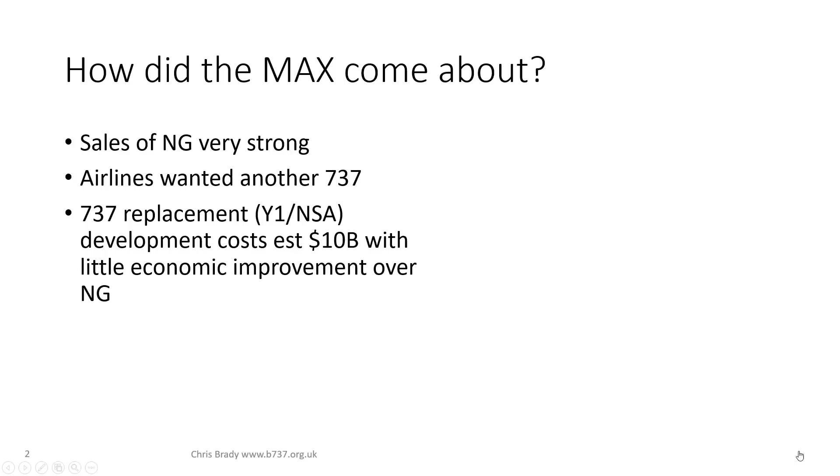So what happened? Why did the MAX come about? Well, the answer actually wasn't from Boeing or from the airlines. It was from CFM. In 2008, they announced the LEAP engine, which was at a stroke going to offer a 20% fuel efficiency improvement over the CFM 56. Now this got everybody interested. The airlines wanted it, and Boeing had to deliver it.

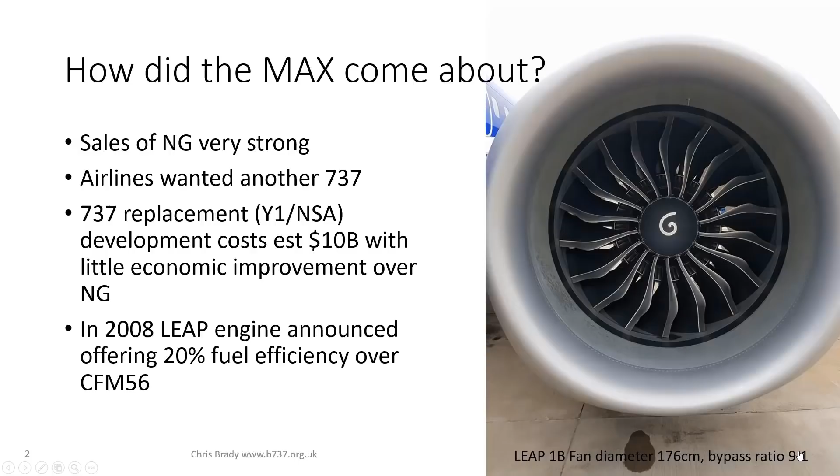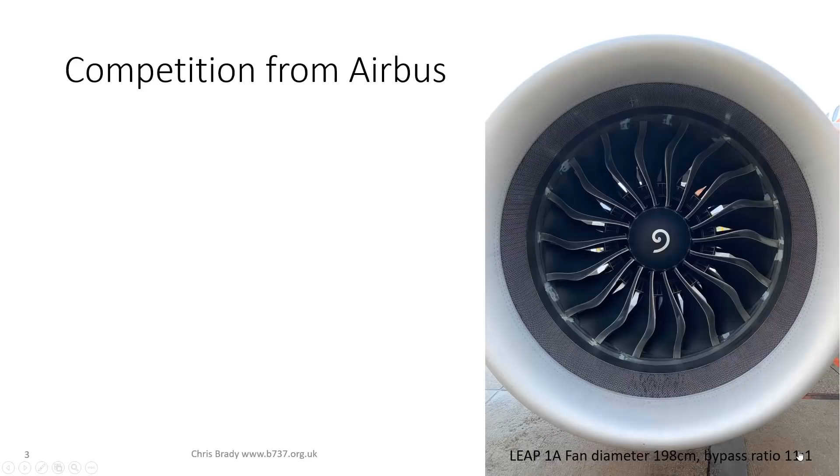However, the A320 family also used the CFM56 and therefore would also use the LEAP engine. Now when I say the A320, I include the 318, 19, 20 and 21. The A320 family is a physically taller, larger aircraft than the 737.

That actually goes back to when the A320 was first designed. It was built with the CFM56 engine, which is a high bypass engine. The original 737 was built with a JT8, which had very little bypass. So the 737 sits lower to the ground than the A320 for historic reasons.

This gave Airbus the advantage. The A320 family could accept the full diameter LEAP engine without any significant redesign. I say full diameter because, as you see in the bottom right, the fan diameter of the LEAP 1A, the Airbus version, is 198 centimeters, giving it a bypass ratio of 11:1.

The largest version that Boeing could accept had a 176 centimeter diameter. That's 22 centimeters less diameter, thereby reducing the bypass ratio on the 737 version to 9:1. So again, there was a loss of economy there.

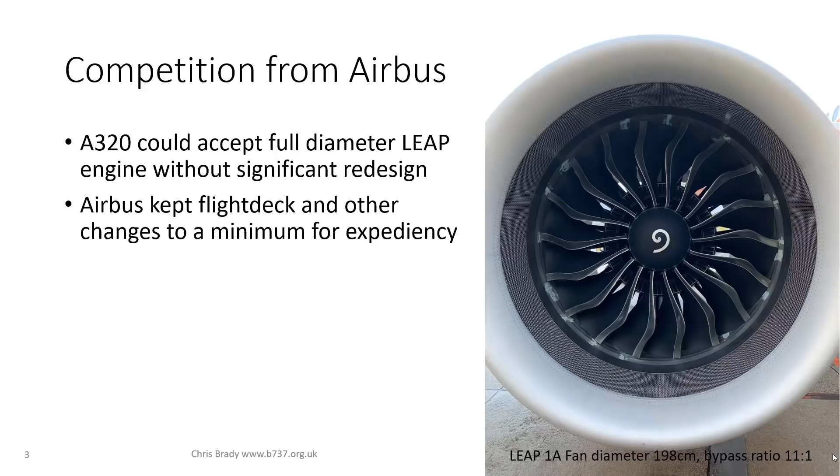Secondly, Airbus kept the flight deck and any other changes to a minimum for expediency. If you look inside the flight deck of the Neo, it is identical to the CEO, the conventional engine option. There were no changes made other than the engine, whereas on the MAX there were many changes. The flight deck is significantly different in the MAX compared to the NG, and there were various other airframe improvements as well, the most obvious being that the tail cone is now conical instead of the old bulbous version, for drag savings.

All of this meant that Airbus were able to launch and take orders 18 months before Boeing. So you see from this that Boeing were immediately on the back foot. This was the first time that the two manufacturers had ever launched a new version of their narrow-body aircraft at the same time. Normally they've been able to take their own sweet time and develop them with the time that they needed.

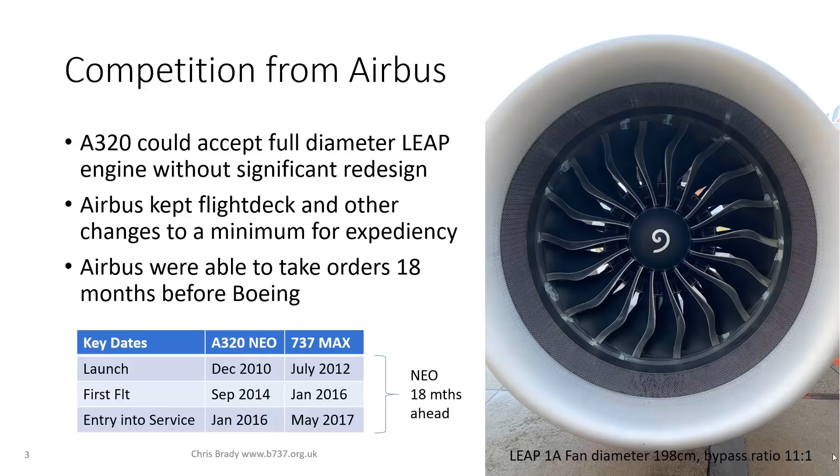But for the MAX, because Boeing was so on the back foot, it was — well, I hesitate to say rushed — but they were always conscious of the competition from the Neo. And all the time that passed meant that the Neo was taking orders that the MAX was not able to take.

So how did MCAS come about? Soon after launch in 2012, wind tunnel data simulating high-speed wind-up turns showed that the aerodynamic interaction between the larger LEAP engine nacelles and the wing created a non-compliant pitch-up. In this case the nacelles were acting as wings in themselves, creating lift. The pitch-up is non-compliant — how do you fix it?

Boeing actually looked at many aerodynamic ways to fix this. They looked at revising the wing vortex generator pattern, at changing or adding a leading edge stall strip, and at revising the leading edge vortilon patterns, but none of these were successful.

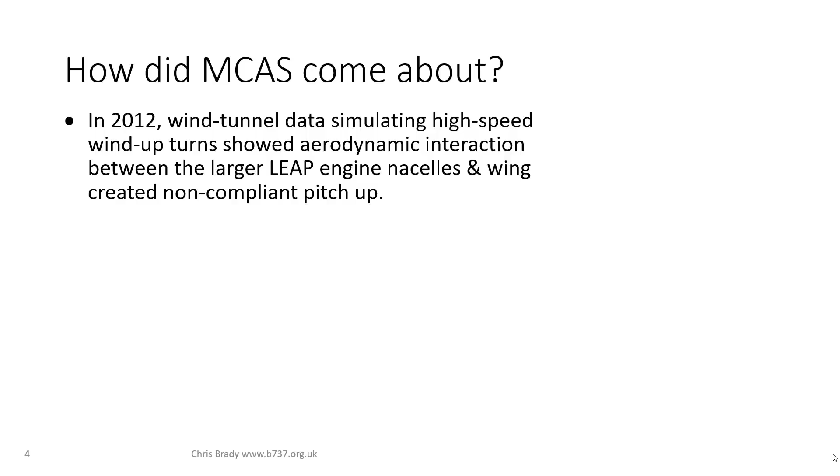So in the end, what they did was borrow a system called MCAS, Maneuvering Characteristics Augmentation System, that they'd fitted to the KC-46A, which you probably better know as the 767 tanker. Now, a couple of things to note about this: it was an absolutely sound, safe design on the 767, and it was only designed to operate, as I quote from the graphic on the right there, at extreme high-speed pitch-up conditions that are outside the normal operating envelope.

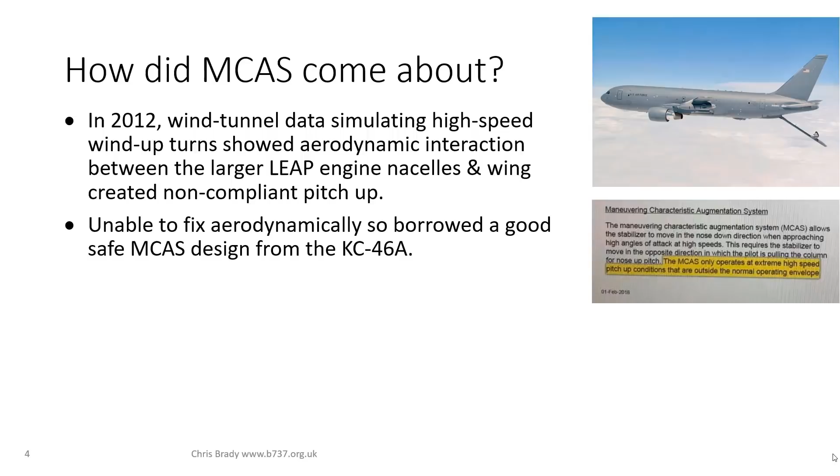So what changed? In March 2016, a couple of months after the first flight of the MAX, flight testing discovered that the low-speed 1G handling was non-compliant against various CFRs, most particularly 25.203, which covers stall characteristics. What they found was that as you approach the stall, the stick force gradient on the control column was actually reversing.

The midsection of the wing was creating lift for longer than expected because of the interaction between the nacelle and the wing. So it was holding on to the lift for longer, and when the stall did break, it fell away quite dramatically.

So the scope of MCAS was extended to low speed, and the logic was changed. Unfortunately, the system safety assessment was not updated, the FAA weren't informed, and MCAS was not documented in the FCOMs or indeed anywhere.

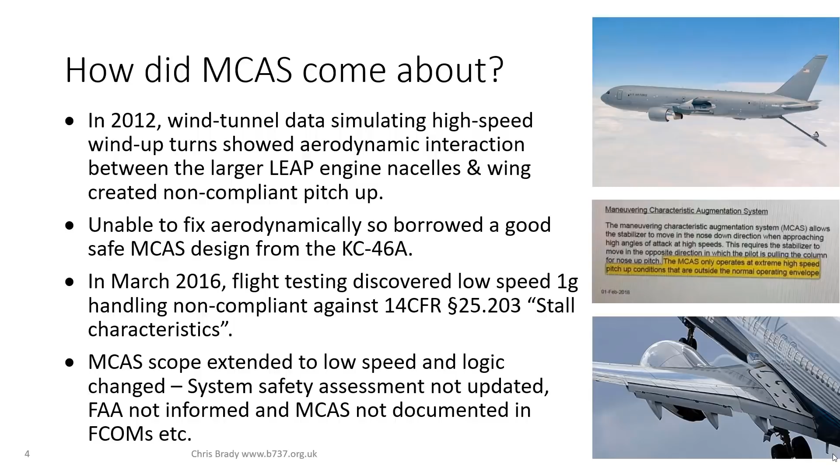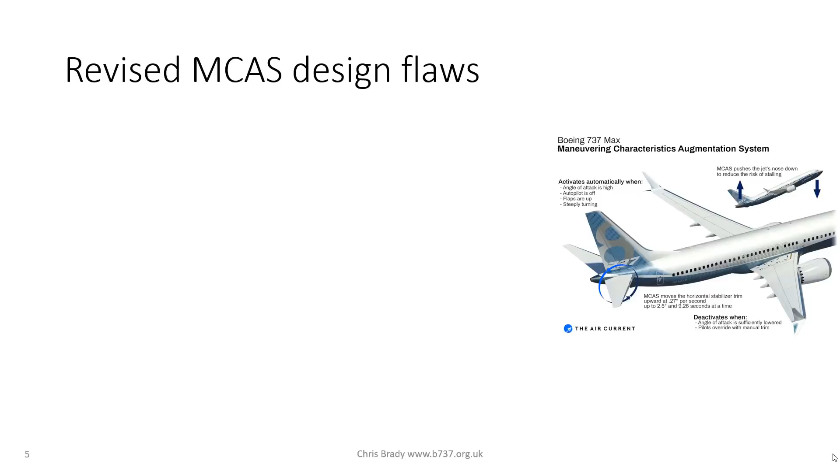So let's take a closer look at these MCAS design flaws. This is the revised version of MCAS. The original version was fine, but the changes they made were the following.

First of all, the activation trigger was from a single angle of attack source. Previously, it had been from an angle of attack source and an accelerometer, because G had been a trigger as well.

Secondly, they changed MCAS on the 737 at the low speed end to continue to cycle—that's 10 seconds on and 5 seconds off—for as long as the condition existed. The 767 version and the original high-speed version was just one cycle.

Thirdly, they had to increase the stabilizer authority of MCAS because they were dealing with a low-speed regime rather than a high-speed regime. And they allowed MCAS to apply more stabilizer than can be counteracted with elevator.

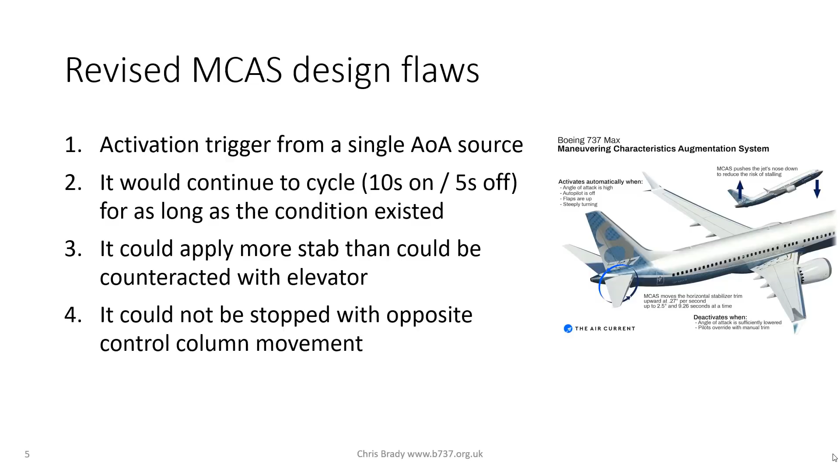Fourthly, the MCAS movement of the stabilizer could not be stopped with opposite control column movement. Now, it could on the 767, could not on the 737.

And finally, there was no dedicated failure warning light or QRH procedure for misbehaving MCAS. Boeing did actually look—it's a matter of public record now—that there was an idea to make an MCAS warning light on the flight controls panel, but for reasons which we'll come to, that idea was rejected.

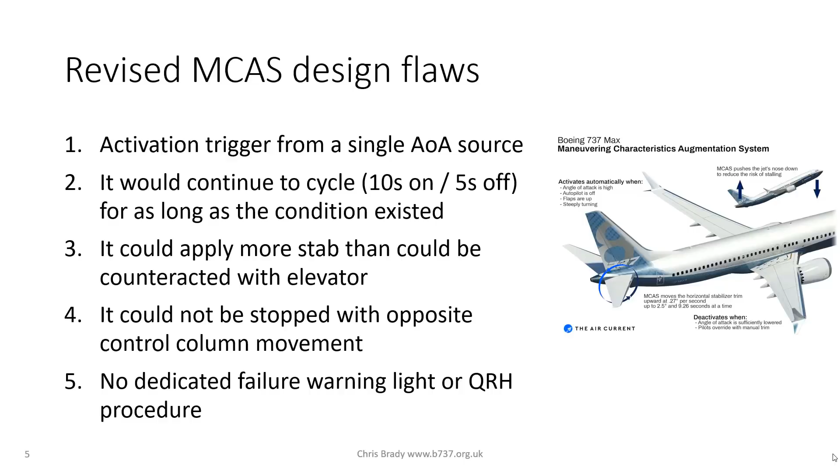Let's take a closer look at that single angle of attack issue. Here's what I was asked about it almost 2 years ago now by BBC Panorama.

If you look in a flight deck, there's actually two of everything, and there's two of everything for a damn good reason—that if one fails, you've got another one. For a system which can have such a dramatic, significant and catastrophic effect on the aircraft, to take its input from one source runs contrary to everything in aircraft design. And I am staggered that Boeing designed it that way. I was also going on to say there was a stagger that Boeing designed it that way and that the FAA certified it that way. Again, we'll come on to those issues.

So let's take a closer look at this angle of attack sensor issue. The 737 has got two angle of attack sensors, one on each side of the nose cone. But MCAS activation was only triggered by a single sensor.

That's because the MCAS is a sub-function of the flight control computer, and only one flight control computer is active on any given flight. The flight control computer in use flip-flops between flights, so on the first flight of the day it'll be FCC1, second flight of the day FCC2. With FCC1, the MCAS feed will come from the captain's angle of attack sensor. When FCC2 is in use, MCAS takes the feed from the first officer's angle of attack sensor.

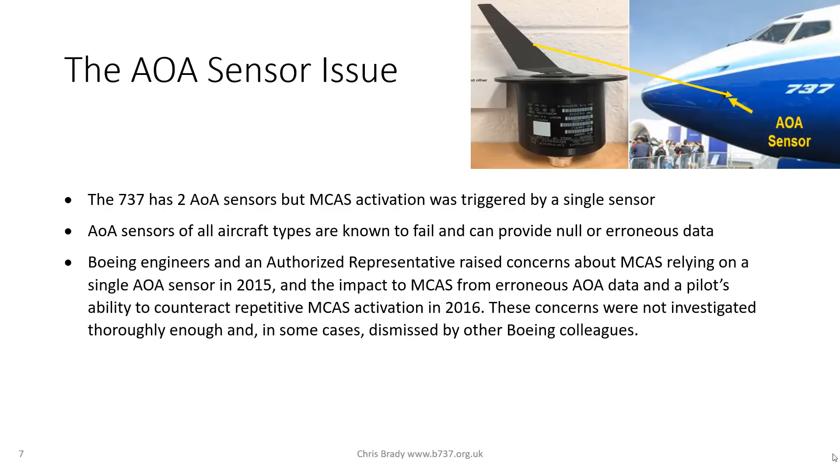Boeing engineers and an authorised representative—now an authorised representative, or AR as they're known, these are Boeing employees that are supposed to report to the FAA and be the FAA's eyes and ears—raised concerns about MCAS relying on a single angle of attack sensor as early as 2015, and the impact to MCAS from erroneous angle of attack data and a pilot's ability to counteract repetitive MCAS activation in 2016. These concerns were not investigated thoroughly enough, and in some cases they were dismissed by other Boeing colleagues.

Next, Boeing discovered in August 2017 that an angle of attack disagree alert was inoperative on 80% of its aircraft. Boeing chose to conceal this fact from the FAA, affected customers and MAX pilots until after the Lion Air crash. Most astoundingly, Boeing continued to manufacture and deliver scores of MAX aircraft with non-functioning angle of attack disagree alerts.

So the angle of attack disagree alert was standard on the NG, and it was supposed to be standard on the MAX, but there was an optional angle of attack indicator display on the PFD, the primary flight display. And due to a programming error, the angle of attack disagree alert was deactivated if customers hadn't paid for the optional angle of attack display.

Now, Boeing discovered this in 2017, a year or so before the first accident, but did not get this fixed. And this could have been critical in the diagnosis of the problem on the accident flights.

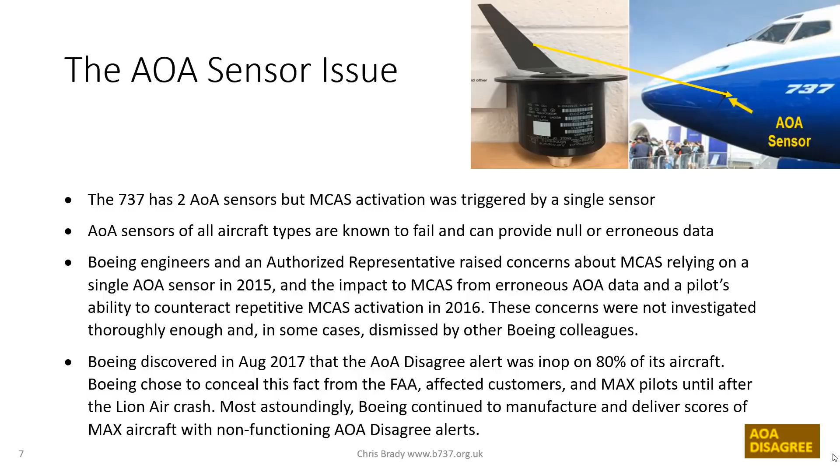So let's look at the accident flights. The first one actually started the day before the accident flight. A refurbished angle of attack probe was miscalibrated 21 degrees too high, and it was installed on the Lion Air MAX.

The aircraft got airborne. The crew got a stick shaker immediately after takeoff. They got indications of an airspeed disagree, and MCAS activated.

Fortunately, there was a pilot on the jump seat. He assisted, and he advised the crew to switch off the stabilizer trim cutout switches, which would deactivate MCAS. Now, none of the pilots knew what MCAS was, but the guy on the jump seat had the capacity to see the stabilizer trim moving uncommandedly, and he directed the crew to switch off the stabilizer trim cutout switches.

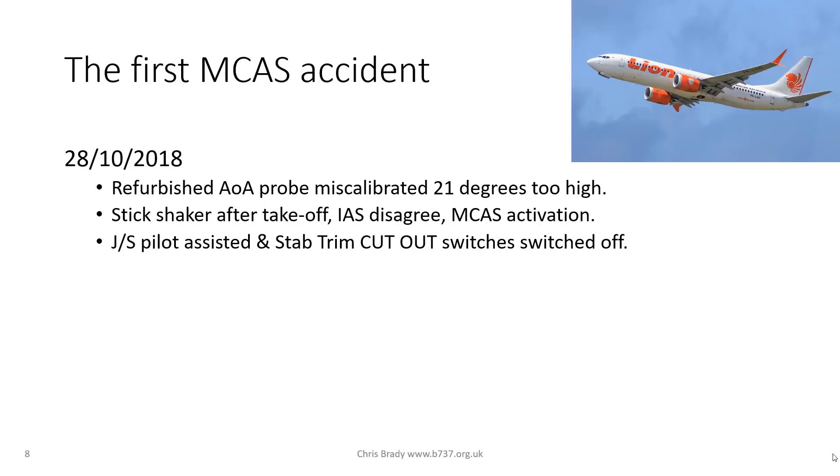That aircraft landed safely. A tech log entry was made as follows, and this is a quote from the report: IAS/ALT disagree shown after takeoff, and feel differential pressure light illuminated. Because that's all the guys knew had happened - they were the indications in the flight deck.

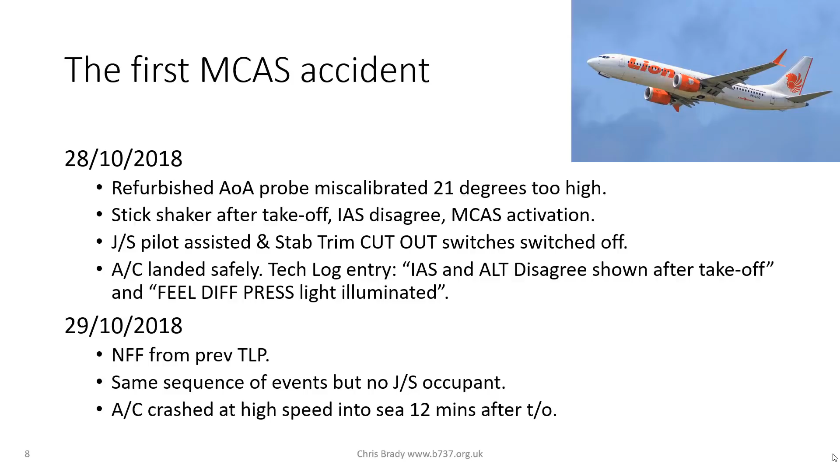Overnight, the engineers worked on that tech log entry, and no faults were found. The aircraft took off again with a new crew. The same sequence of events happened, but there was no jump seat occupant. That aircraft crashed into the sea at high speed 12 minutes after takeoff.

Let's look at Boeing's response to this accident. Boeing issued an FCOM bulletin to emphasize the procedures provided in the runaway stabilizer non-normal checklist. The condition for the runaway stabilizer is given as uncommanded stabilizer trim movement occurs continuously.

Now, I would suggest to you that what the guys got was not a continuous movement of uncommanded stabilizer trim. What they got was up to 10 seconds of stabilizer trim movement followed by 5 seconds off, because that's the programmed logic of MCAS at the time. It was 10 seconds on, 5 seconds off. Furthermore, if you interrupted the 10 seconds on with electric pitch trim, it would stop.

So you would think that you had solved the problem by applying electric pitch trim in the opposite direction. What would happen is, once you'd applied the electric pitch trim, behind the scenes MCAS would count to 5 and then start again.

So the notion that this is a continuous uncommanded stabilizer trim movement is false. And why is that important? Because if you look at the very title of the procedure, runaway stabilizer, if you ask any pilot to describe a runaway condition of the stabilizer or anything, it will be a continuous uncommanded movement towards the full limit, not this sporadic, intermittent application of stabilizer, which is what the crew's got.

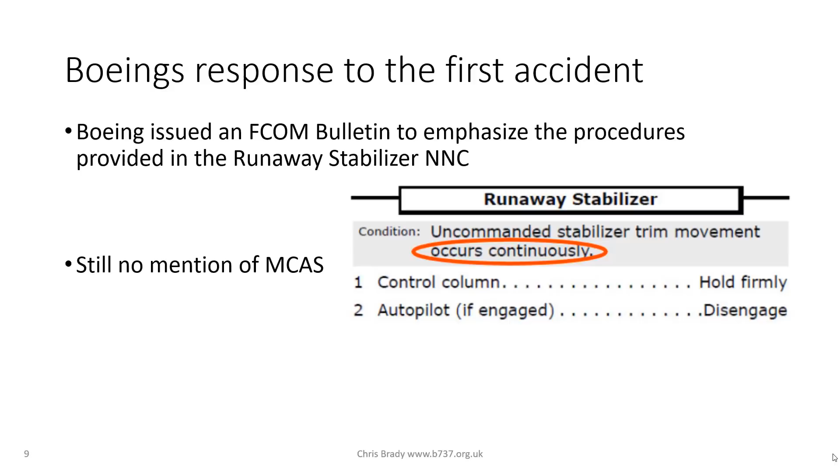Boeing still did not mention MCAS anywhere in that bulletin or anywhere at all. The House Transport Committee's final report on the MAX accidents, which I will quote several times in this presentation, states that the collective responses of the FAA and Boeing in this critical time period between crashes were woefully inadequate and appeared predisposed to blame the pilots.

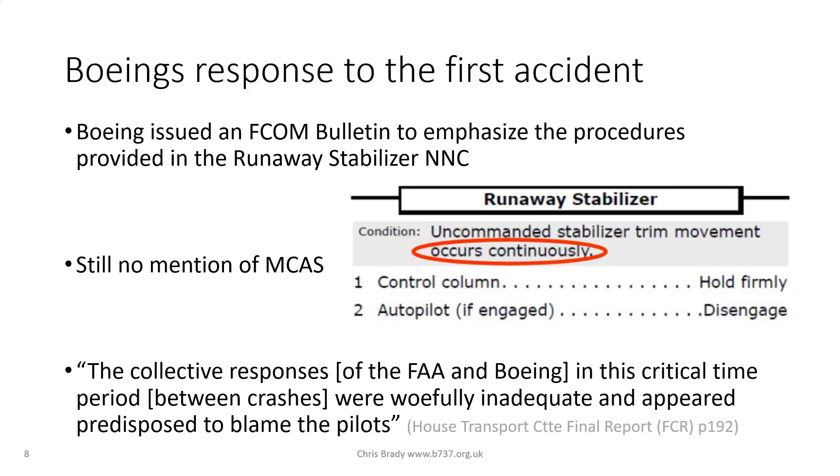I was asked, as have many people been asked, about the actions of the flight crew. Were they good enough? And here's my response. Boeing have suggested that they didn't follow the right procedure. Is that fair? It is unfair.

It's absolutely unfair. If you're going to design and certify an airliner with such a complicated, obscure failure mode as happened to that crew, it's no wonder that your average crew aren't able to deal with it. So let's look more closely at this issue of should the crew have done better.

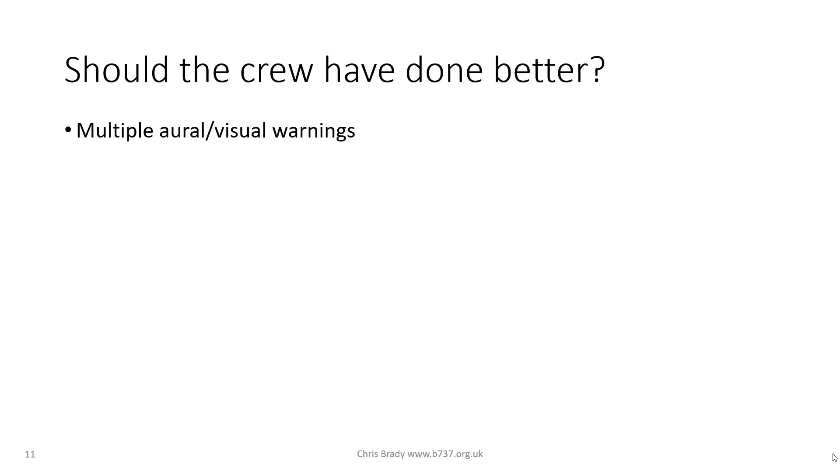Let's have a look at what they got in the flight deck. Multiple aural and visual warnings. The stick shaker sounded the instant there was weight off wheels. So as soon as the aircraft got airborne, the stick shaker started, and it continued all the way until impact. The stick shaker is noisy. The stick shaker vibrates the control column. It is a hell of a distraction.

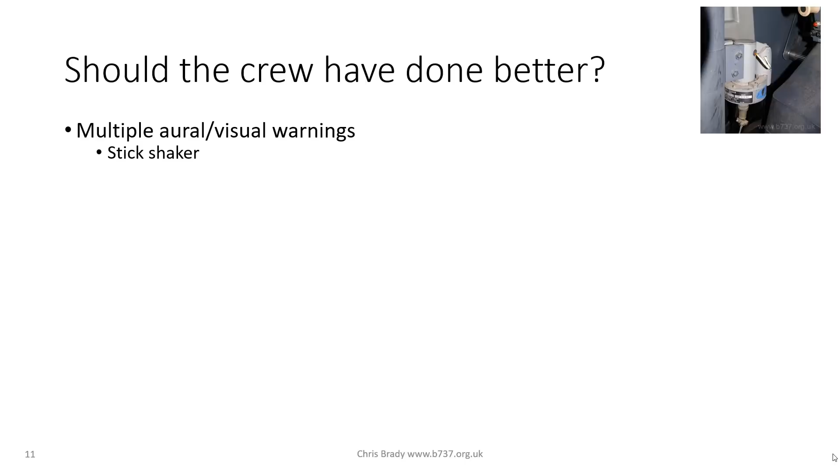There was a difference between the left and right hand flight director pitch bars. Those on the left were saying pitch down because the left alpha vane thought the angle of attack was too high. And the PLIs, the pitch limit indicators, were also pitching down.

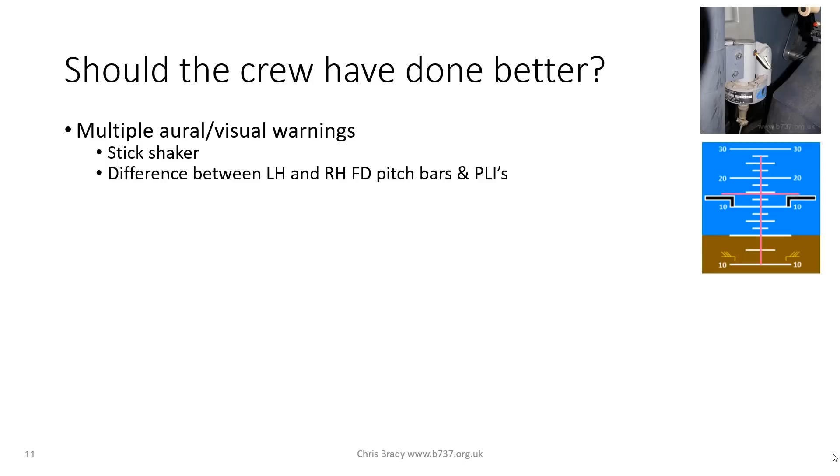The crew got IAS disagree, ALT disagree alerts, and also feel differential pressure caution. This is because the angle of attack feeds into the air data computer, which generates the speed and altitude you see on the PFD.

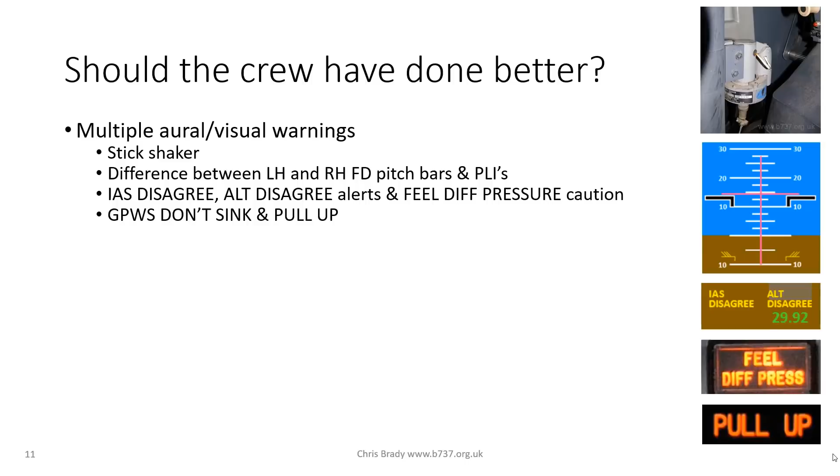GPWS don't sink and pull up. MCAS comes alive after flap retraction, which is commenced at 1,000 feet above ground level typically. Once the flaps were retracted, which would have been say 1,500 feet, the MCAS will have pitched the aircraft down, and that will have given both don't sink and pull up warnings. They are attention getters.

As the flight progressed, the airspeed increased and increased because they were at takeoff power, or actually back at climb power, and the aircraft had been pitching down on numerous occasions, and that combination obviously would give you a very high airspeed, and the overspeed clacker would be sounding.

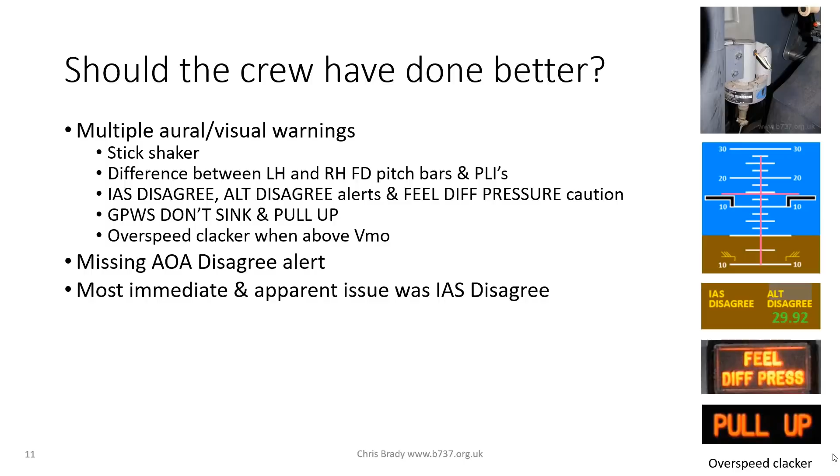So after flap retraction, you get the nose down stabilizer trim for 10 seconds on, 5 seconds off, paused with 5 seconds with the use of electric pitch trim. And that happened on multiple occasions before impact on both flights. I think it was 12 on one flight and 20 on the other. Multiple occasions.

There was no QRH procedure for this scenario. Boeing did not publish one. There's no EICAS on the 737, or ECAM if you're an Airbus pilot.

So the 737 will show warnings like the feel differential pressure one on the right hand side of the screen there, and it will bring up a master caution system, and from there you then look in the QRH for the appropriate caution and action that procedure.

There's been a lot made since these accidents that EICAS would have detected, for instance, the angle of attack disagree, and would have got down to the root cause of the problem. How true that is or not, we can only hypothesize. But certainly there were, without doubt, multiple warnings going on, and EICAS could have prioritised those.

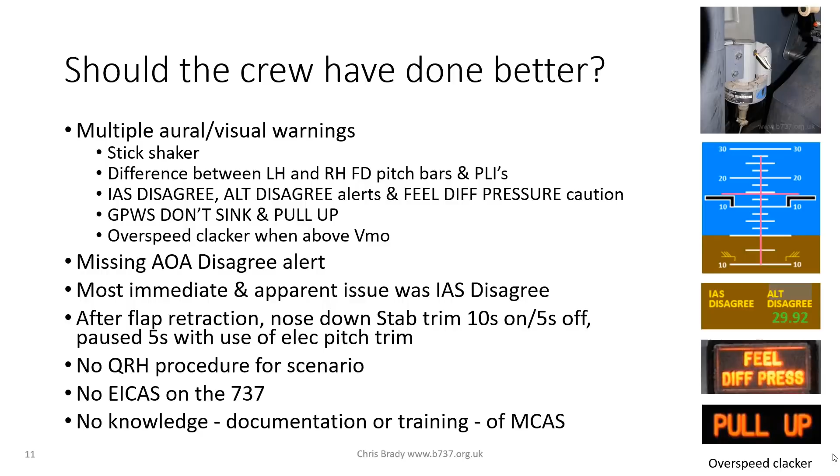Let's look at the second accident. Ethiopia, 10th of March 2019. The angle of attack sensor failed on takeoff at a little over 74 degrees. Again, the crew got the stick shaker, airspeed disagree, MCAS activation, etc.

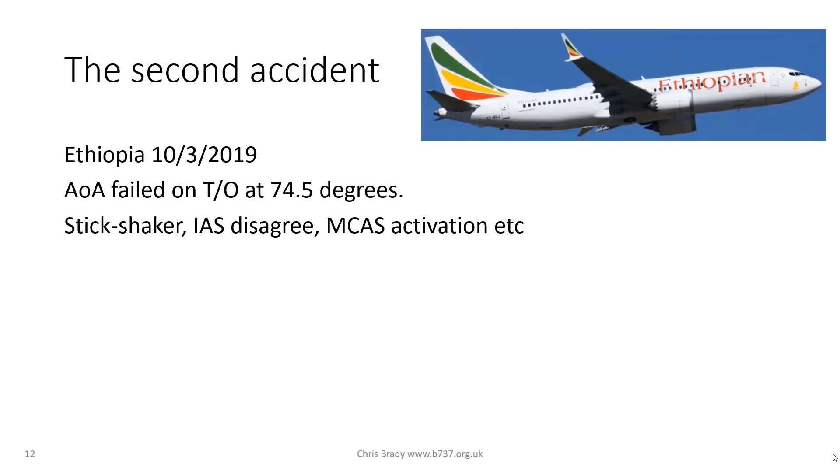In this case, the crew, after 5 minutes, perhaps with the benefit of the knowledge in the bulletin, elected to switch off the stabilizer trim cutout switches. But unfortunately, having done so, they were then unable to move the manual trim wheel because of the high aerodynamic loads.

The CVR heard the FO say he was unable to move the trim wheel. Now, at this time, the aircraft was well over VMO, so the aerodynamic loads were very high. But the control column forces were also very high.

All 346 people on the 2 accident flights perished.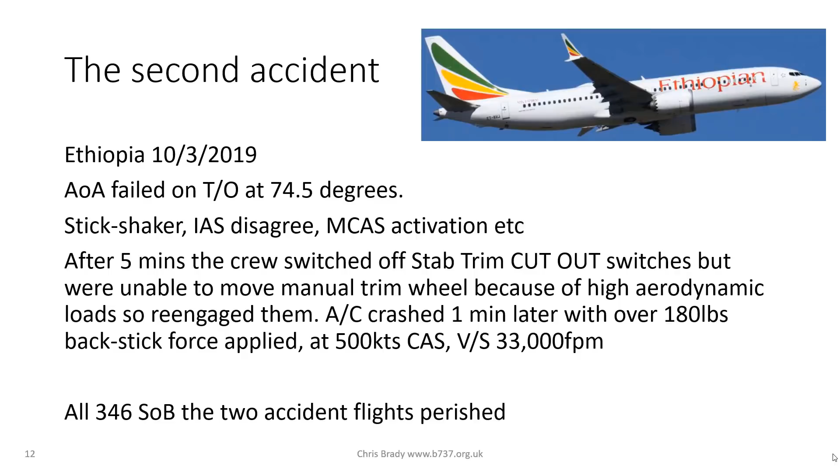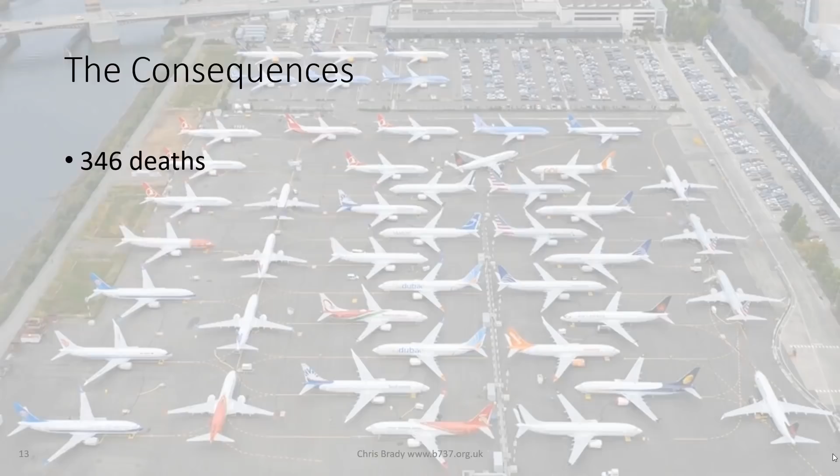So, the consequences. 346 deaths. The MAX was grounded for between 20 and 22 months. It was 20 months for the FAA, 21 for Transport Canada, and 22 for EASA, from the 13th of March 2019, during which time more issues were discovered.

These were things like the capability of the flight control computers, wiring runs down to the stabilizer, debris found in the fuel tanks from production, various things.

The whole episode is believed to have cost Boeing over $23 billion in direct costs alone, plus around 1,200 cancelled orders. Now the list price for each aircraft is, assuming about $100 to $120 million depending on the type, that gives you the 144. If Boeing's profit was, I don't know, 10% of that, there's another $14 billion. So this is already 2 to 3 times more expensive than having designed a whole new aircraft.

Finally, there was worldwide loss of confidence in the MAX brand, Boeing, the FAA, and the regulatory system. I mean, these events did untold damage. However, this is in the process of being fixed and changed.

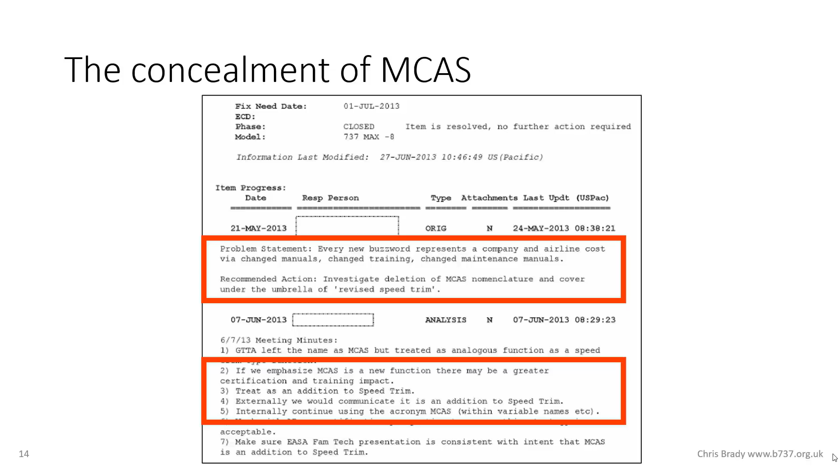The extent of this concealment was actually fairly wide-ranging. Boeing concealed internal test data from 2012, back in the ECAB simulator, that revealed it took a Boeing test pilot more than 10 seconds to diagnose and respond to an uncommanded MCAS activation, a condition which the pilot found to be catastrophic. Federal guidelines assume pilots will respond to this condition within 4 seconds.

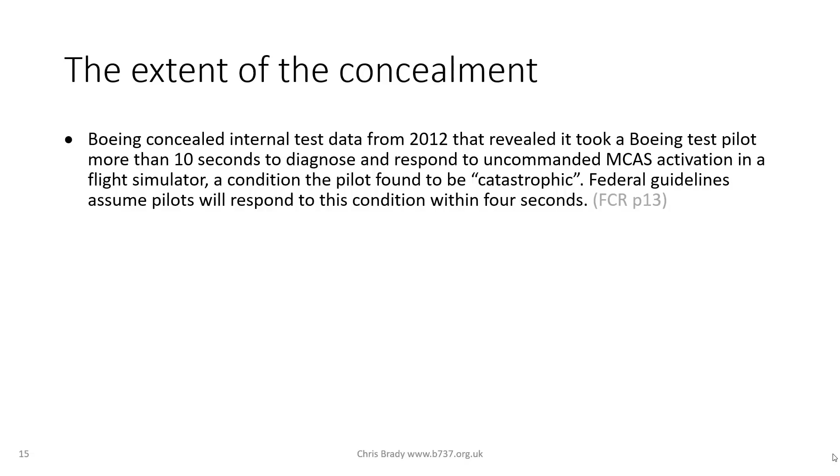If that fact had been declared, more safeguards would have had to have been built in. It wasn't, so they weren't. In 2013, a Boeing authorised representative approved Boeing's actions to describe MCAS externally as an addition to the speed trim system, as opposed to a new function, due to Boeing's fears that if we emphasise MCAS as a new function, there may be greater certification and training impact. That's the slide I showed you previously.

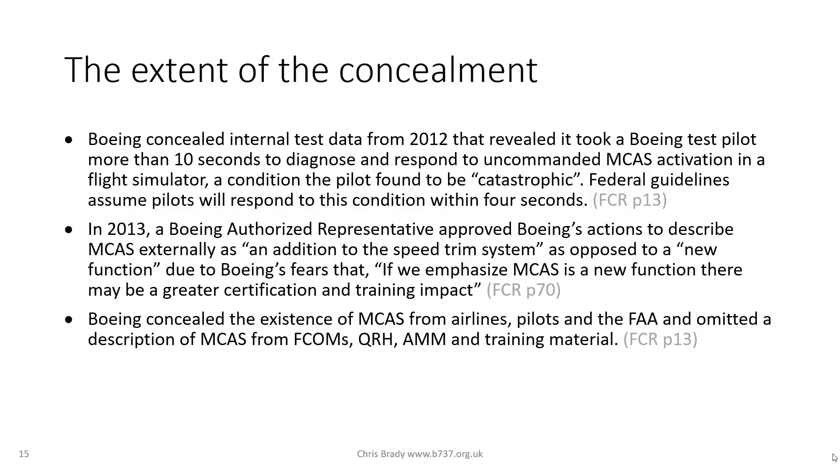Boeing concealed the existence of MCAS from the airlines, pilots and the FAA, and omitted a description of MCAS from FCOMS, QRH, maintenance manual and training material. And immediately following the Lion Air crash, both Boeing and the FAA failed to alert the MAX pilots of the very existence of MCAS. The FAA even removed reference to MCAS from its draft emergency AD.

Now, all 4 of these bullets are not my words. They are all quotes verbatim from the final committee report, which again I will show you later.

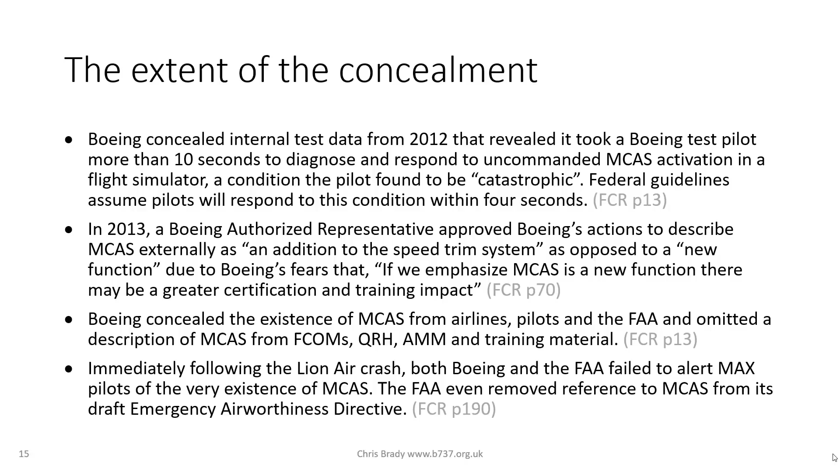So why conceal MCAS? Well, as we've already mentioned, Boeing failed to classify MCAS as a safety critical system because it would have attracted greater FAA scrutiny during the certification process. Well, what's the problem with that? Cost, of course. But not just the direct cost of building safety - whatever enhanced safety systems would be required.

Again, remember the competition element with Airbus. The MAX was 18 months behind the Neo. It was losing hundreds and hundreds of orders to its competition. For Boeing to redesign MCAS or put in the necessary safeguards - well, as we've already seen how it played out once the aircraft was grounded, it took over 20 months to unground the aircraft.

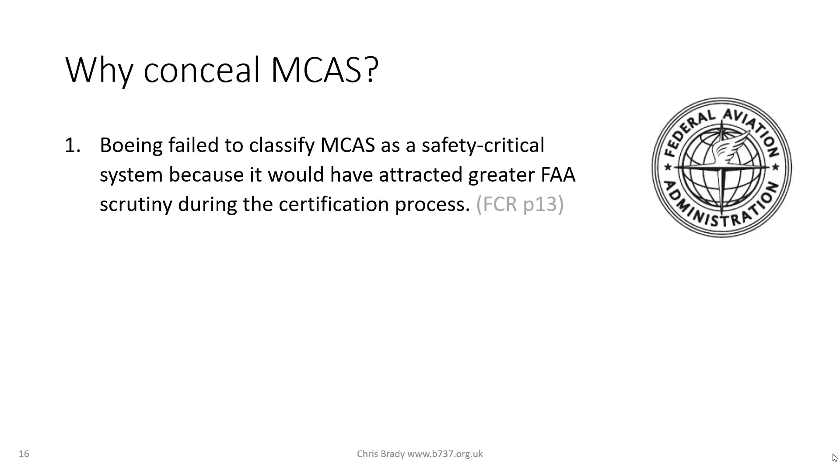So this is obviously what Boeing were concerned about, that to redesign the MAX to FAA's satisfaction would have taken a significant amount of time, during which it would have lost many, many orders to Airbus. A further view on this is that guaranteeing the MAX didn't require simulator training for pilots transitioning from the 737NG to the MAX was a key Boeing objective of the 737 MAX program. This was due to both costs and a lack of simulators.

As of January 2020, only 34 full-motion MAX simulators existed worldwide. Estimated cost savings: $243 million US, a figure derived from a recent settlement Boeing made with the US Department of Justice. To give you an example of these figures, Boeing promised Southwest Airlines a $1 million per tail rebate if simulator training was required.

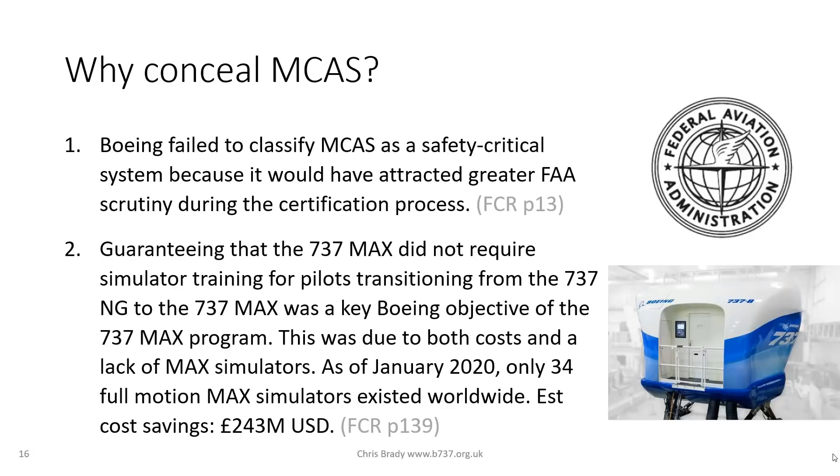So you can see the stakes. In the 20 months or so that the aircraft's been grounded, let's have a look at the fix. All of the design flaws, seen in an earlier slide, have been rectified.

No less than 8 QRH procedures have been revised. Aircraft flight manual limitations are being added. 10 MMEL restrictions have been added. The angle of attack disagree alert must be standard on all aircraft and include a free option to have the angle of attack display.

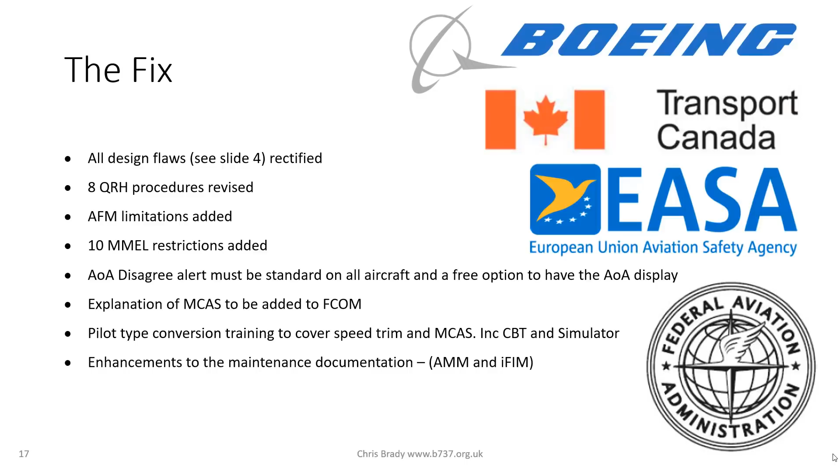An explanation of MCAS must be added to the FCOM. Pilot type conversion training is to cover speed trim and MCAS, including both CBT and flight simulator. Enhancements are to be made to the maintenance documentation, the aircraft maintenance manual and the interactive fault isolation manual.

A computerized third synthetic angle of attack sensor system is to be added. This was pushed very hard for by EASA, because of course the Airbus has 3 angle of attack probes.

So the Airbus uses a voting system, so if one angle of attack sensor is different to the other two, it gets voted off. With the 737 only having two, a voting system can't apply, but with a third sensor that could. Now Boeing aren't going to physically mount a third sensor on the aircraft, but it will come up with a synthetic angle of attack sensor, and that will be standard from the MAX 10 onwards.

And finally, this is a restriction imposed by both Transport Canada and EASA to provide a mechanism for crew to inhibit an erroneous stick shaker. And that's because a single angle of attack source can trigger an erroneous stick shaker, and it could do this in all generations of the 737. I had this myself on one of my angle of attack failure incidents.

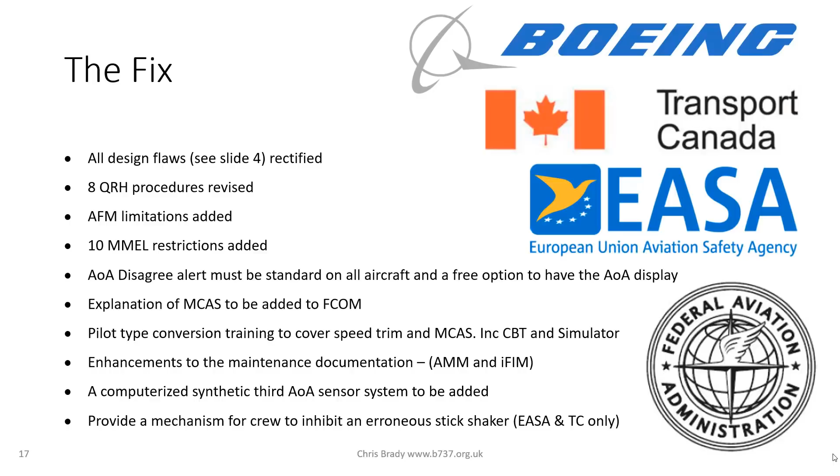So let's just look a little more closely at that US House report I've been referring to. This is the US House Committee on Transportation and Infrastructure, and in September 2020 they published this very comprehensive report. I'll give you an excerpt from the summary. It states that the MAX crashes were not the result of a singular failure, technical mistake or mismanaged event. They were the horrific culmination of a series of faulty technical assumptions by Boeing's engineers, a lack of transparency on the part of Boeing's management, and grossly insufficient oversight by the FAA. And I think that statement is absolutely fair.

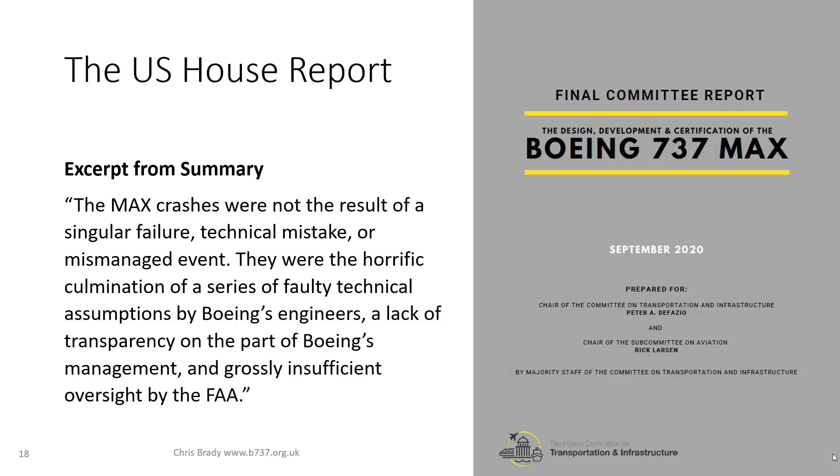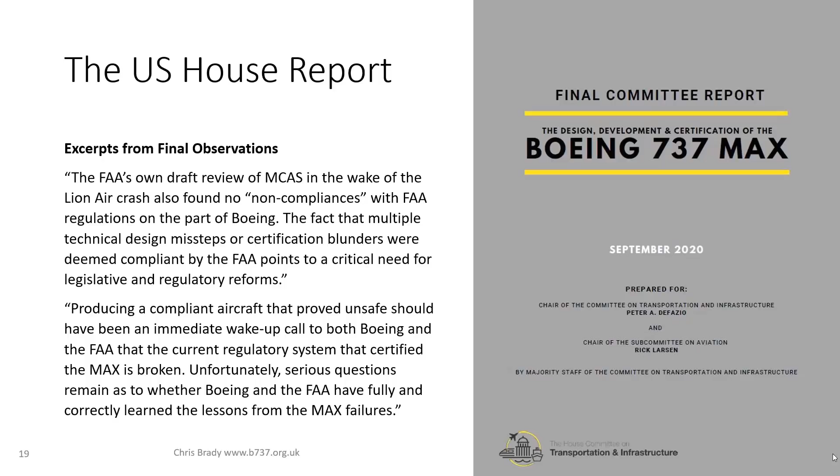One other excerpt. The FAA's own draft review of MCAS in the wake of the Lion Air crash found no non-compliances with the FAA regulations on the part of Boeing. The fact that multiple technical design missteps or certification blunders were deemed compliant by the FAA points to a critical need for legislative and regulatory reforms. Producing a compliant aircraft that proved unsafe should have been an immediate wake-up call to both Boeing and the FAA that the current regulatory system that certified the MAX is broken. Unfortunately, serious questions remain as to whether Boeing and the FAA have fully and correctly learned the lessons from the MAX failures. So there we go, we have an aircraft which was compliant but unsafe.

So, the bigger picture on this. The NTSB issued 7 safety recommendations to the FAA, calling upon the agency to address concerns about how multiple alerts and indications are considered when making assumptions as part of design safety assessments.

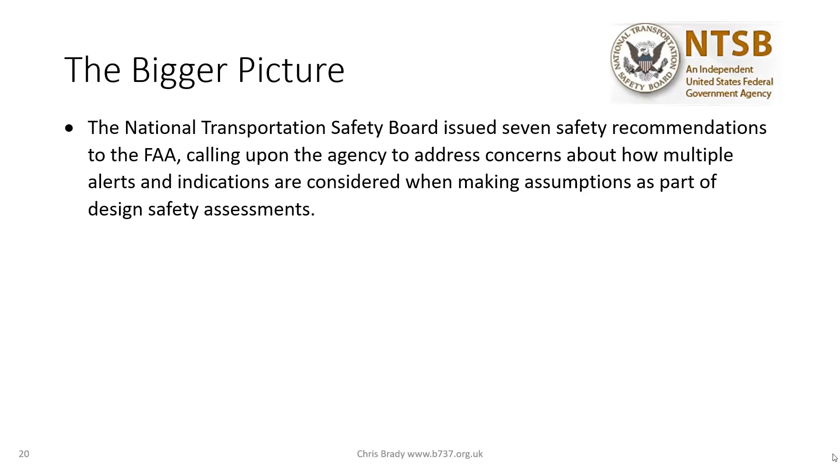The 7 recommendations issued to the FAA urge action in 3 areas to improve flight safety. First, to ensure system safety assessments for the MAX and any other transport category aircraft that used assumptions about pilot response to uncommanded flight control inputs consider the effect of alerts and indications on pilot response and address any gaps in design, procedures and/or training.

Second, they develop and incorporate the use of robust tools and methods for validating assumptions about pilot response to airplane failures as part of the design certification. And finally, incorporate system diagnostic tools to improve the prioritization of and more clearly present failure indications to pilots to improve the timeliness and effectiveness of their response. And this, of course, is alluding to EICAS or ECAM.

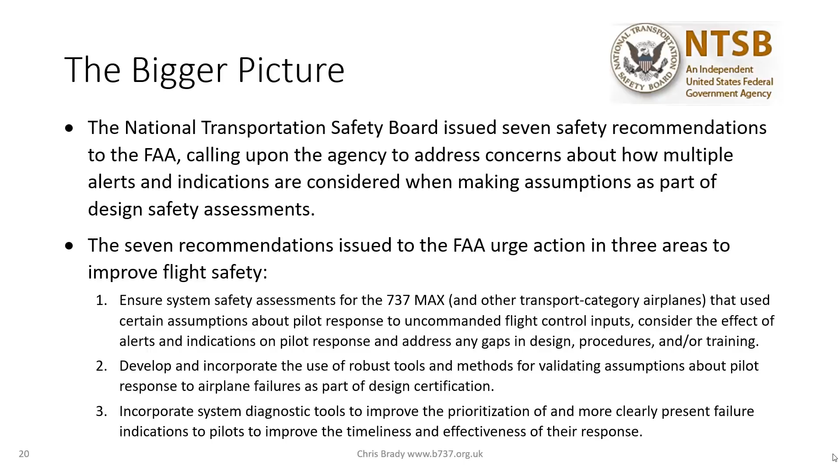So, has this been enshrined in law? Well, sort of. In December, Congress passed the Aircraft Certification, Safety and Accountability Act to reform and strengthen the FAA's aircraft certification process. There were many provisions in this, and I'm just going to give you a few of them. Improvement of certain FAA rulemakings related to and increased oversight of the type certification process and the Organisation Designation Authorization System. This basically is clamping down on Boeing's in-house self-certification of the type and the whole issue around authorised representatives.

Provide new confidential reporting channels of the FAA and whistleblower protections for manufacturer employees, because people were flagging this up before the accidents and nobody was listening, or at least no action was being taken.

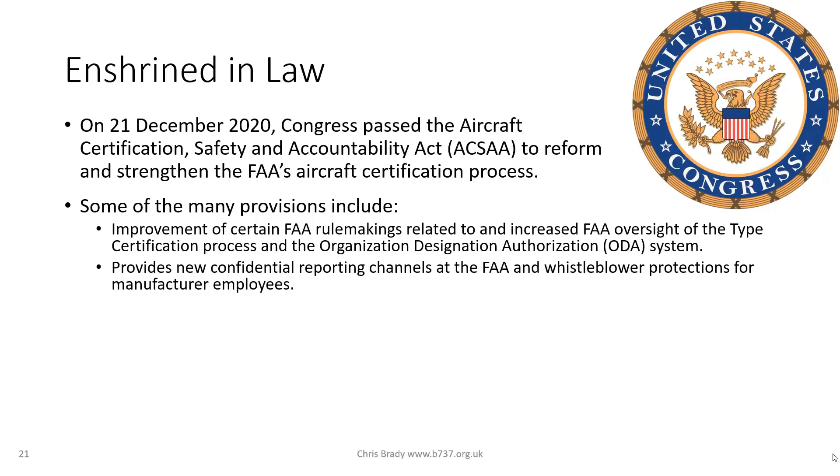Ensure that manufacturers will complete system safety assessments on all new and derivative aircraft designs for flight control systems that consider realistic pilot responses to flight deck alerts. This, of course, was never done, or at least the original system safety assessment on the original version of MCAS was done, but it wasn't redone for the revised version for low speed.

Require the FAA to review pilot training, including manual flying skills training, and the assumptions relied upon by the FAA and manufacturers when designing an airplane, and to work with the international community to improve pilot training globally. Well, there we go. I think manual flying skills is the subject of a whole other presentation.

Finally, authorise new funding for the FAA to develop or expand an FAA Centre of Excellence to address flight automation and pilot response.

So there you go. Now these are, as I say, enshrined in law, and there are many other provisions as well. So things have been done.

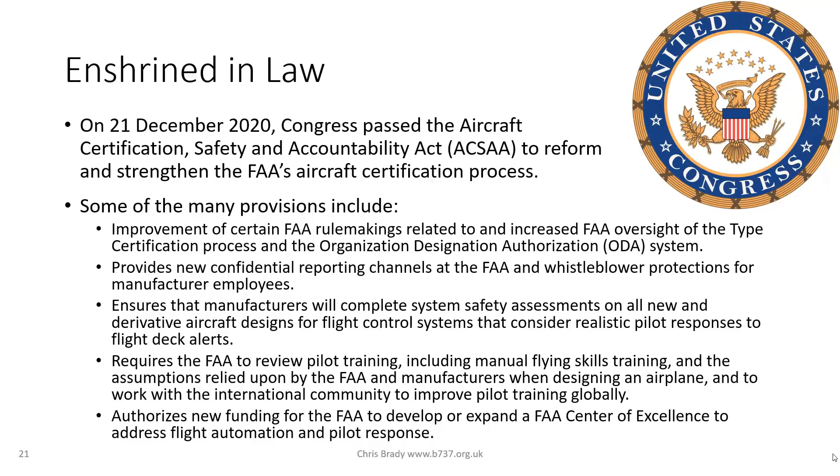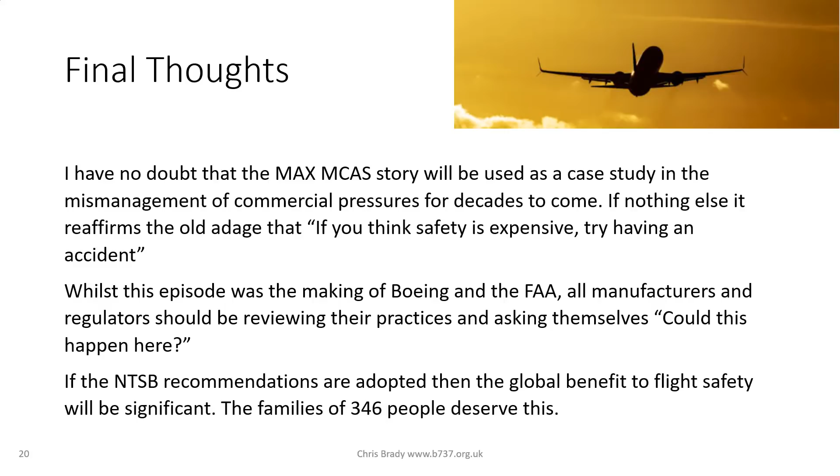Are the handling characteristics and SOPs of the MAX significantly different to the Classic and NG?

No, they're not, and intentionally so. Boeing tried hard to make all generations of the 737 handle and behave like the previous version, which isn't a bad thing, because certainly the original versions, the 100 and 200 series, are the only ones I've never flown. But I've spoken to many pilots who have, and they say they handle beautifully, arguably the best of all. Whether that was just some nostalgic view of it, I'm not sure. But certainly it's always been an objective of Boeing to have all generations of the 737 handle as near identically as is feasibly possible. And I, like many Boeing pilots, have jumped in and out of, on the same day, classics and NGs. And I dare say pilots will be doing it between the MAX and the NG, and we'll notice no significant handling differences at all.

A question from Mark, who was asking, why didn't CFD or wind tunnel testing uncover the non-compliant low-speed handling earlier? Great question.